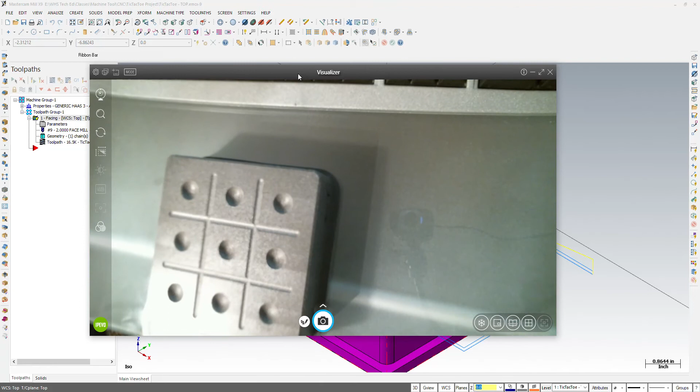Now that we've done our facing operations by bringing the whole block down to 1.8 inches thick, we're ready to start contouring around the outside to get the actual tic-tac-toe block down to the right width and length. So we're now going to be taking that end mill and we're going to be running it full depth right around the outside here. Multiple passes to do that.

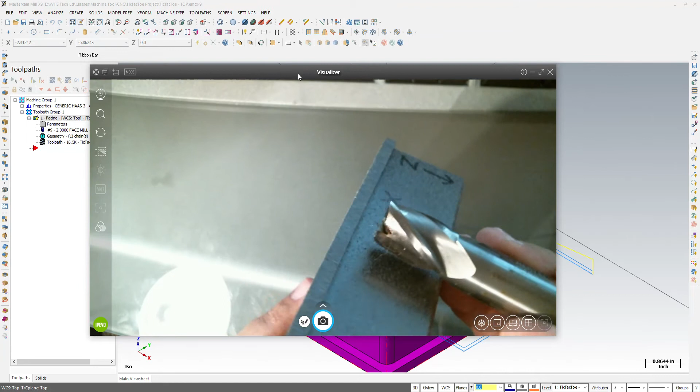We need to make sure that the end mill we're using has enough flutes to get this full depth if we're going to do it that way. The one that I'm holding does not, but the one that we'll program will have enough flutes that it'll have full cut all the way to the outside. This one could only really cut this far deep.

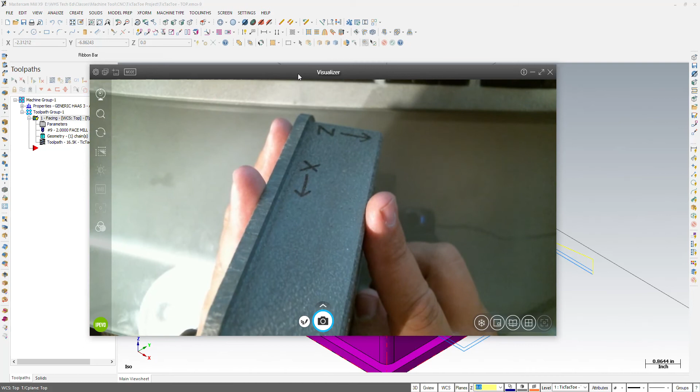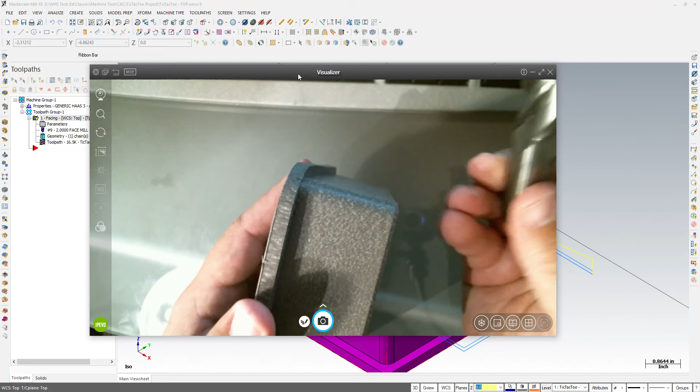Because we're doing a full depth cut, in our last video or two, we talked about the maximum depth of cut to be 100 thousandths or 0.1. We're going to break that rule, but we're going to do it because we're only going to take a little bit each pass coming in, a little bit at a time. We're not going to take real heavy passes this direction here. It might be full depth, but it's going to be small in that direction. So there are some ways that we can get around those general rules that we set here for our program, and that's one of them, is by taking a little bit at a time.

So looking at where we are, if we're going to start in, we're going to go to the top view again. Anytime we start a new tool path, we want to make sure we're in the top view. We're going to go Tool Paths, Contour. 2D or 3D, we're going to stay 2D. We're just going to grab this edge right here, and it should automatically, it did not, see it grab this little fillet. I'm going to do other face. It's not grabbing it.

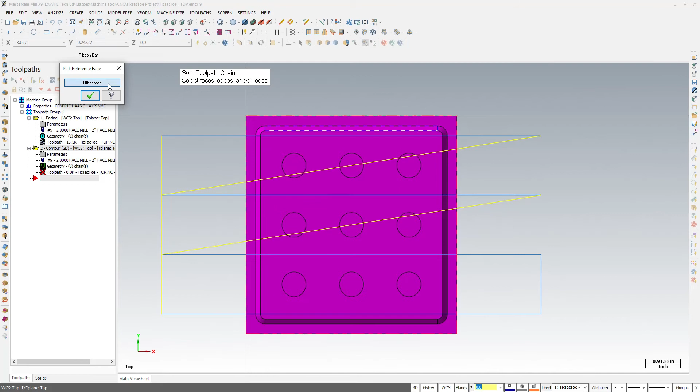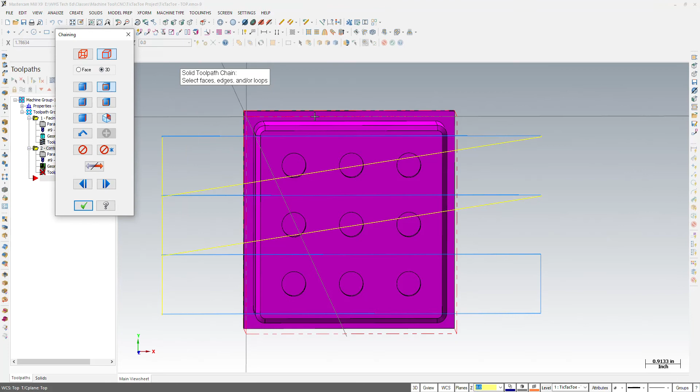Okay, let's try, no, tool path, contour, let's grab that edge. Nope. Okay, so if that doesn't work, there are other ways to grab that edge. We're going to actually rotate just a little bit so we can get down to the bottom. Toolpath, contour, 3D. We're going to grab that edge way down at the bottom. It does not matter depth-wise where we grab our contour, because when we get to linking parameters in the windows, we can tell it how deep we're going to cut anyway. So as long as we can get the profile that we want, it's going to work. So, okay.

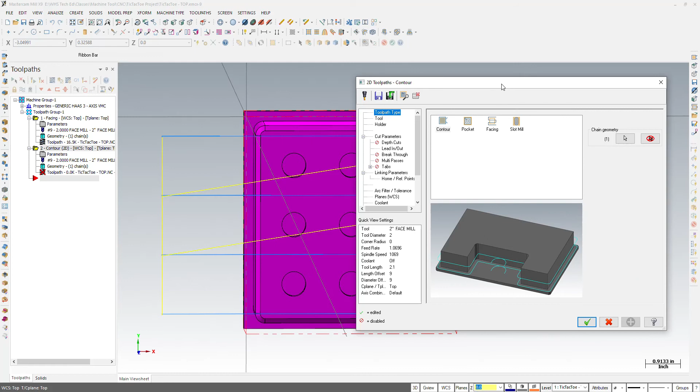And now we're into our window with all the settings. So, tool, we're going to be using a 3/4 inch end mill. So select library tool, filter, and we're going to go to end mills right there. Okay. We have lots of them to choose from. Here's the 3/4 inch, 0.75. You might not be able to see your diameters very well. If you expand this little window right here, you can see diameters a lot nicer, which helps you find them. I mean, you can read them too, but it helps you find what you're looking for.

This does happen to say that this particular one, in the simulation purposes, has a flute length of, I don't know if it's saying 2 inches or if that's overall length, but it does have some general settings in here. Again, it doesn't really matter for the purposes of Mastercam as long as we load the right tool in the CNC. So 3/4 inch.

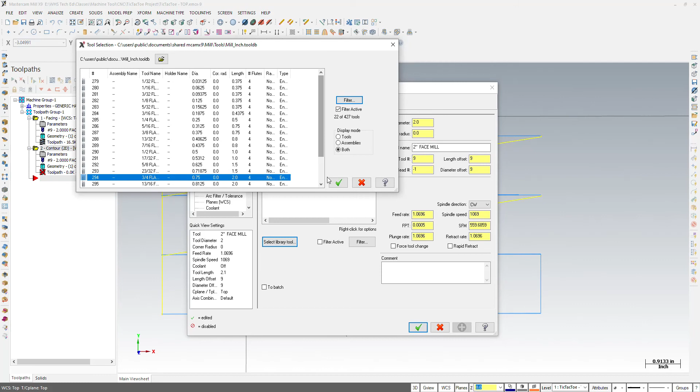For tool number, in the CNC, this is going to be tool number 8. The face mill was 9. So 8, 8, and 8. You do need to change, especially the length offset and tool number. They need to match. I always change the diameter offset right away too. So those should all be set to 8, those 3. 3/4 inch end mill. All right, for spindle speed.

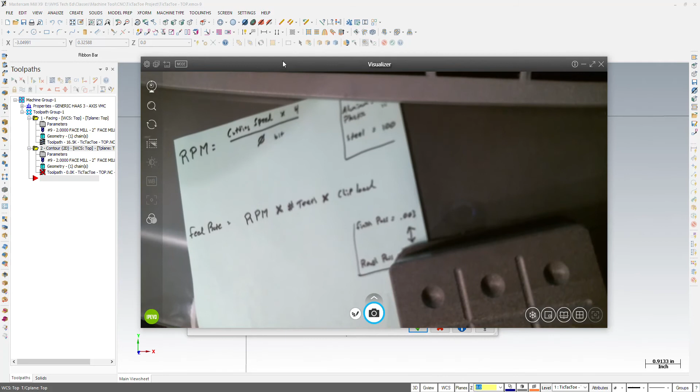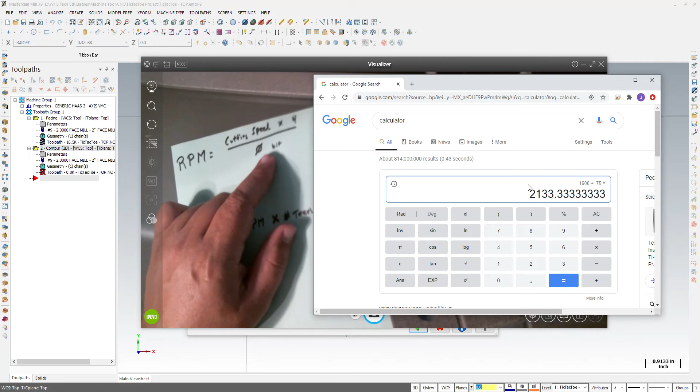So if we pull out our notes from the last video, we have RPM is equal to cutting speed times 4 divided by the diameter of the bit. So 400 cutting speed times 4 divided by 0.75, 3/4 of an inch, gives us RPM of around 2 grand. And I said in carbide it's typically double that, so I'm going to just round it to 4,000. So for spindle speed, 4,000.

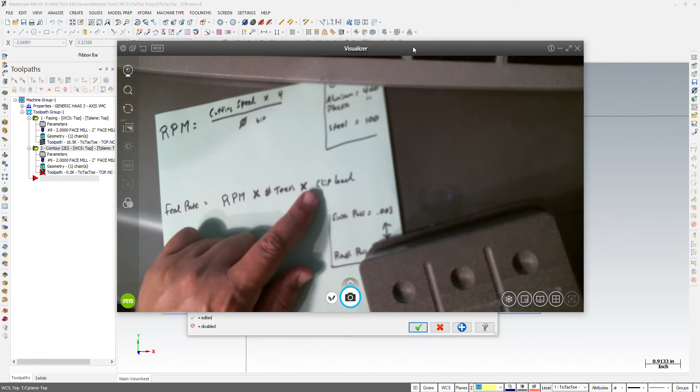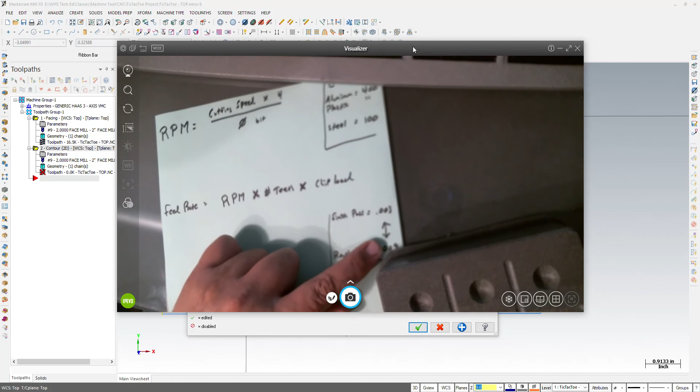All right, for feed rate, coming to this one, RPM times number of teeth times the chip load. So RPM is going to be 4,000 times 4 teeth, times our, and we'll go 5 thou again, chip load. So we bring over our calculator. 4,000 times 4 teeth times a chip load of 5 thou is going to be a feed rate of 80.

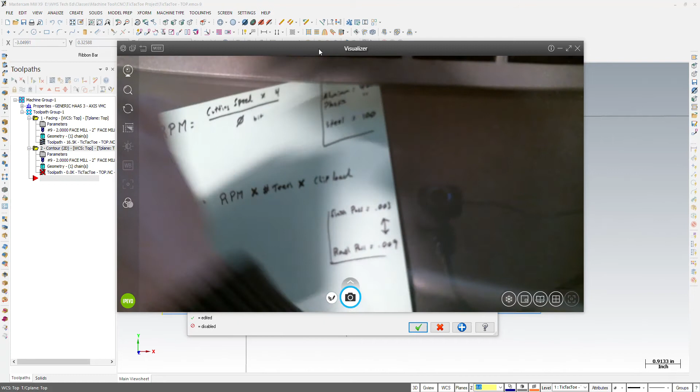Now, normally I would punch in the 80, but as we mentioned, we're going to be taking a full depth pass here. That bit's going to be all the way down in there, taking that full flute length. It can probably handle it, no problem, in plastic, being a carbide end mill. But just for safety's sake, I'm going to slow that down a little bit. So instead of 80, we're going to type in 50.

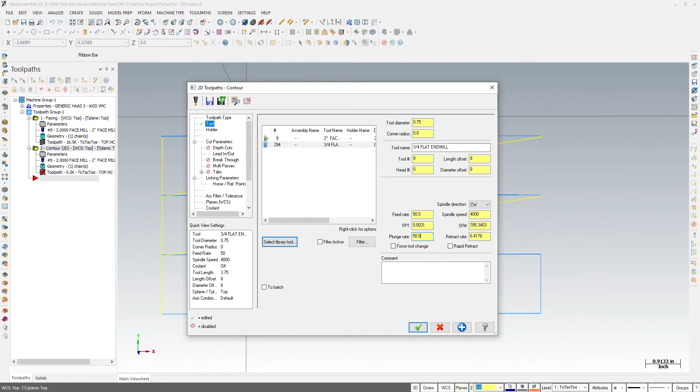Gives us a chip load of around 3 thou instead of the 5 thou we calculated. Plunge rate, we're not plunging into the material, so it doesn't really matter. 50 again, rapid retract to come out quick. So that would be the settings that we have there.

You'll notice our tool still says 294 from when we loaded, even though we told it 8. But as soon as we click out and go back in, it'll now say tool 8, 3/4 inch end mill. Okay. Cut parameters. Holder, we're not doing anything in. We're always leaving holder. So cut parameters.

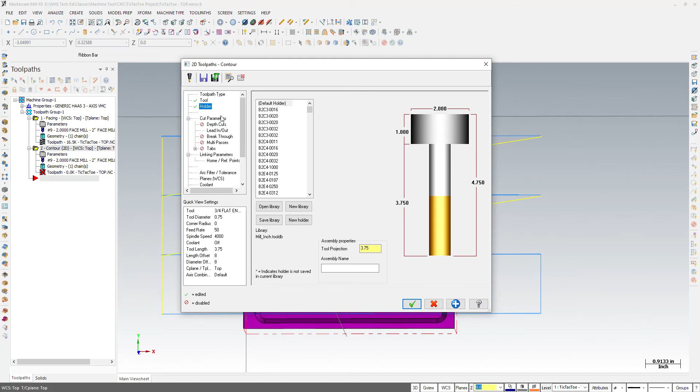We're just going to leave this alone too. We're going to come all the way into the walls. We're going to let the computer do the offsets, so that'll be fine. Depth cuts, we need to turn them on. Right now they're off. I lied. We're going to leave that off because we're going all the way down to our final depth. Otherwise, it'd be taking steps to get down there. So we're going to leave depth cuts off.

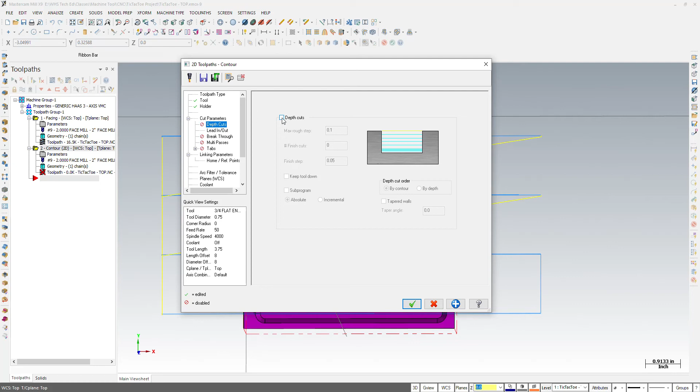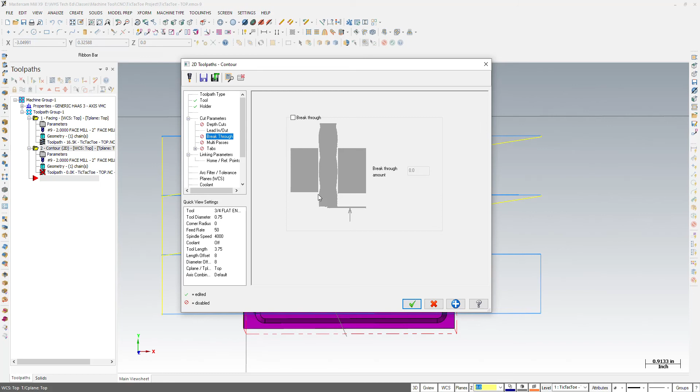Lead in, lead out, we'll leave it at what it's at. Eventually, if we want to play with how far it leads in or out to save on time, we can mess with these two numbers right here, and then these two simultaneously for the out. But we'll just leave it for now. Breakthrough would be as if we're going through the part deeper, which we're not, so we're going to leave that off. Alright, this is the one we're going to mess with, multipass.

We're going to take little bits at a time. So multipass, and we want to take, let's go with 50 thousandths, 0.05 per pass, and we're going to take 5 passes. And we'll get to see what that looks like in simulation. But we can see over here that it's taking multiple passes into the final size, X. Multipass is X and Y direction, horizontally, where depth cuts is going to be Z direction.

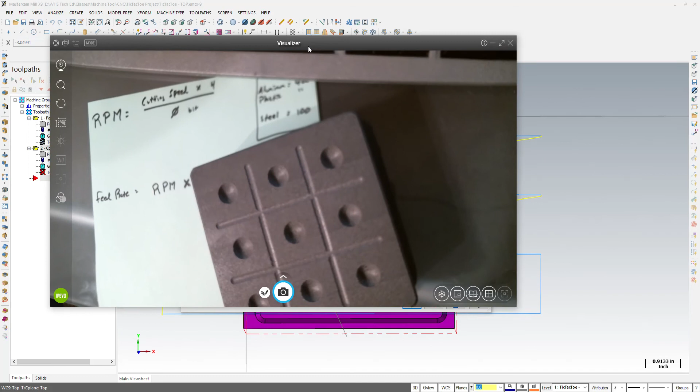All right, oh, we want a finishing pass. 1, and our finishing passes, as we mentioned before, are always 8 thou. So that'll be the nice, clean wall edge when we're done. So finishing pass, we'll make sure that this wall is nice and clean, hopefully smooth for us when the part is done by taking a nice small finishing pass. Alright, I always do finishing passes at the final depth. I always choose keep tool down, just saves time in machining. And there's nothing really in the way to hit in what we're doing. So there's our multipass window.

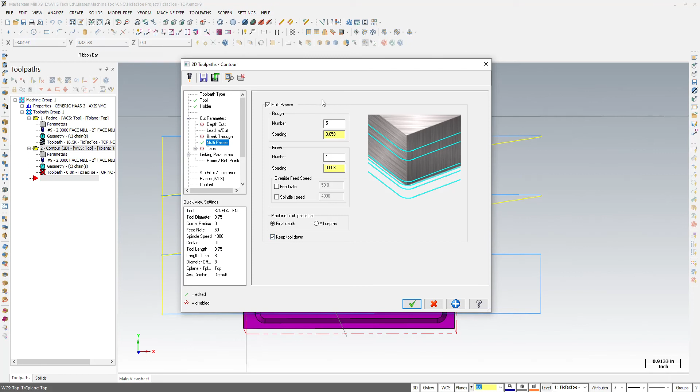Okay, we're going to leave tabs alone. Linking parameters, our rule, always absolute, absolute, absolute. Everything on the left lined up. Depth, we're going all the way down to here, way down there. So it should be negative 1.75 to get all the way down. Top of stock, we're still going to say is way up here at 0. And then these numbers just need to be above top of stock, which they are.

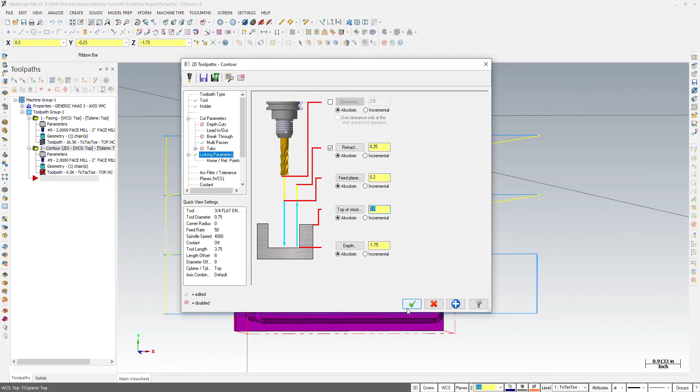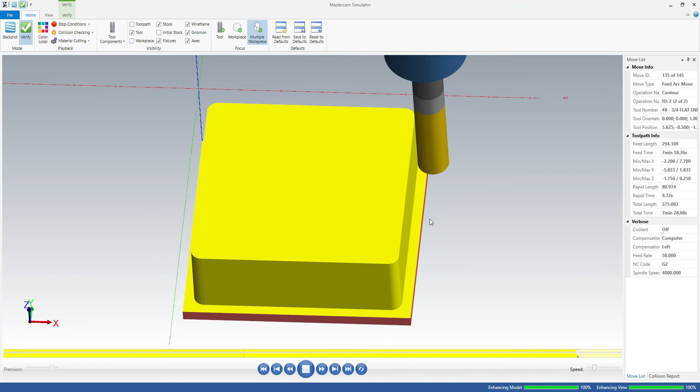And we're good. And you see it created a bunch of passes. Here's our lead in and lead out. Pretty big radius and distance, but it works. And it's coming in 5 passes plus a finishing pass. So green, green, simulate. Rotate a little bit and go. There's our facing passes, 2, 3, 4, 5, and our finishing pass for contouring. All right, let's go play that one more time.

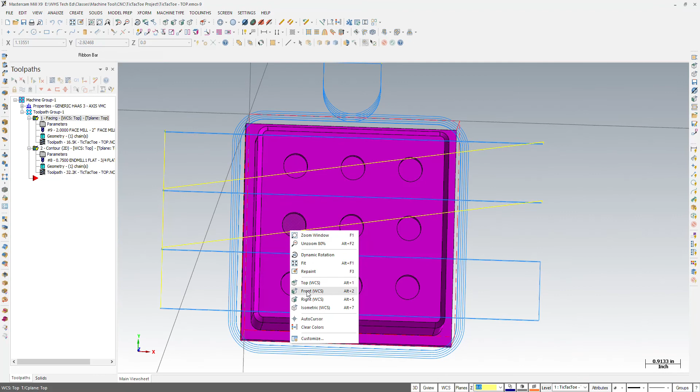Okay, so let's go look at the back plot version. I'm going to go front view again. I'm going to go Alt S for shade. Green, green, back plot, this button. Make sure my tooling is on and hit play. I can speed it up a little bit if I want to get to my next ops. And there, we're going to slow it down. So here is that end mill.

And we can see it's off the part right here, coming around the backside. You'll see it's off the part over here, making one of its multi-passes, but it's all the way down to Z, 1.75 deep. That's one of the reasons I really like watching backplot, is because we can really see what it's doing. It's getting closer, almost there, and I'm going to slow it down because now it's going to come in to that final pass and hit this wall over here. And there, it's right on the wall.

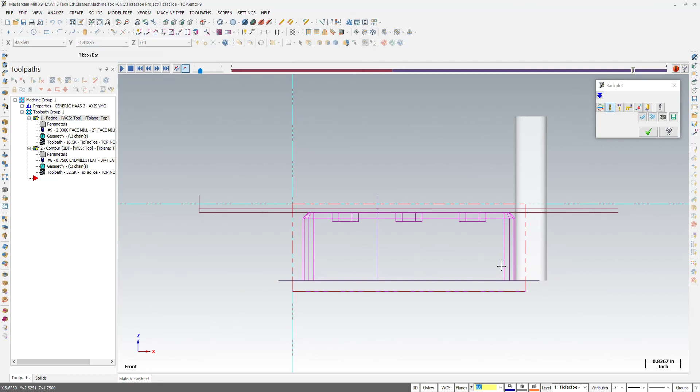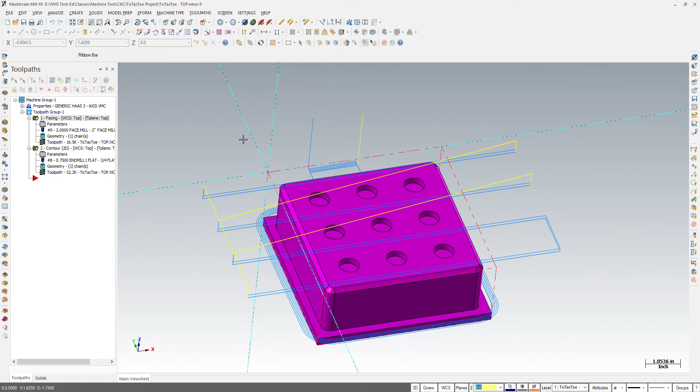So there is the contour of our part. We've now done 2 operations in Mastercam, facing and contouring, and hopefully all of your windows match the parameters that we've been going through here. Tooling, cut, multipass, and linking are the 4 windows that really matter on this particular operation for contouring.